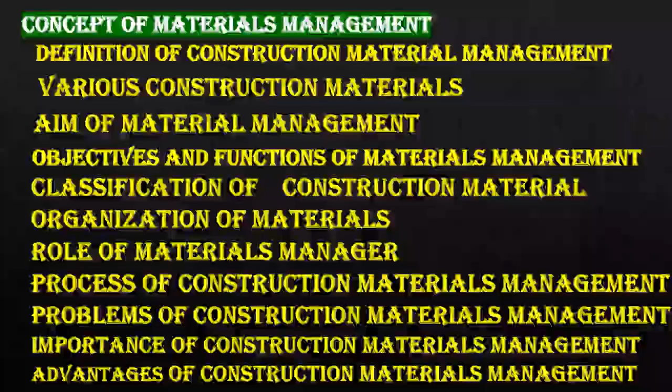So we will discuss one by one. First let us discuss the definition of construction material management.

Materials management is defined as planning, identification, procuring, storage, receiving, and distribution of materials. So this materials management means managing the materials. Since we study construction material management, it is managing the construction materials or managing the materials in a construction project. So how to manage the materials?

We know that all materials in this world deteriorate day by day. As time goes on, the materials deteriorate - their strength reduces, their size reduces. When we take steel bars, they corrode, so the area of steel bars gets reduced. If the area of the steel bars is reduced, naturally the strength also gets reduced. So it is important to manage the materials.

So how to manage the materials? Proper planning, identification - proper planning of materials, how much materials we require. Don't purchase whatever is unnecessary, don't purchase more materials - purchase what is needed for you. So plan to purchase how much materials is required for you.

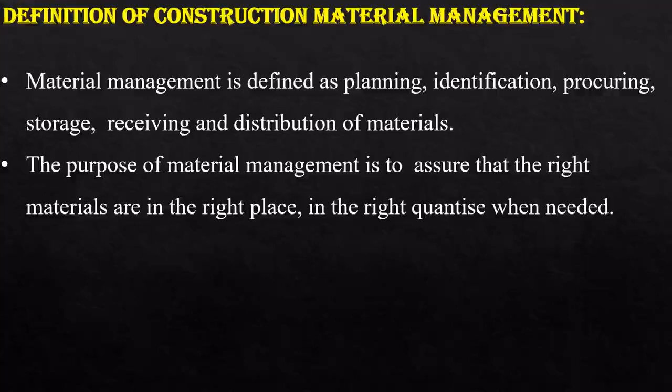Now, the purpose of material management is to assure that the right materials are in the right place, in the right quantities when needed. So that is the aim or purpose of construction material management. You need the right materials - standardized materials, ISO materials, whatever is accepted by the codes. So assure that the right materials are in the right place. When you start the construction project, as per your schedule, your materials should be available in right quantities. The responsibility of the material management department is for the flow of materials from the time they are ordered, received and stored until they are used - that is the basis of material management.

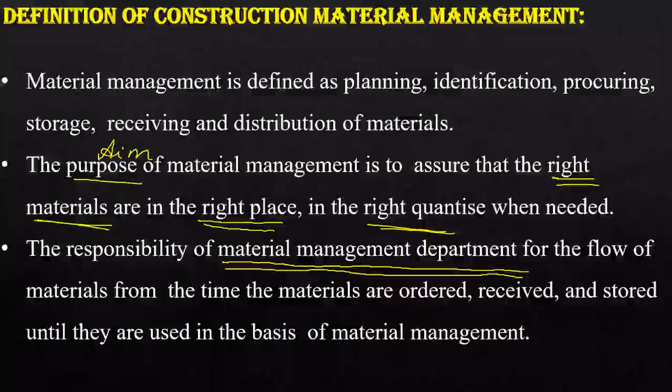In the large construction industry, there is a department called the material management department, because the main resource used for construction is the materials. The duty of this department is to check the flow of materials from the time they are ordered, how they are received and stored, and how they are utilized, so that you can avoid delay in the construction project and proceed your work as per the scheduled time.

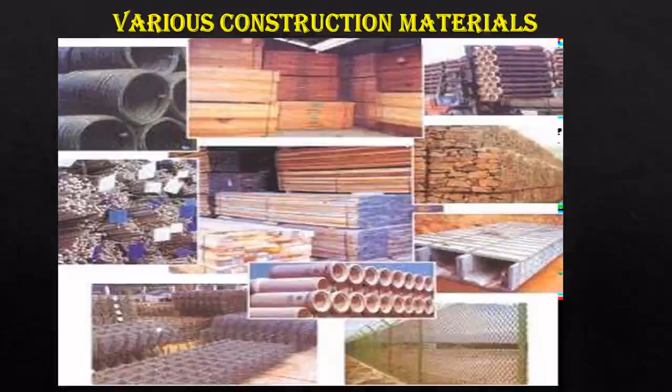Now let us see about various construction materials. Just a photograph showing construction materials - you are all well aware about them. We have various materials like cement, aggregates, fine aggregate, coarse aggregate, water, reinforcement bars, and some specialized materials like super plasticizers, etc. Then, in order to proceed with construction, we need some formworks, etc. Let us see a photograph - wooden materials, the stones, the bars, pipes, etc.

Now let us see the aim of material management. We have already discussed getting the right materials at the right time - that is the purpose or aim of material management. So the aim of material management is to get the right quality, the right quantity of supplies at the right time, at the right place, for the right cost. So, 5 important rights: the right quality, right quantity of supplies, at the right time, at the right place, for the right cost.

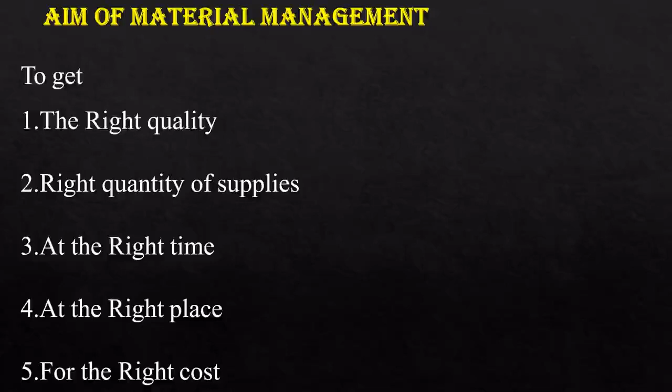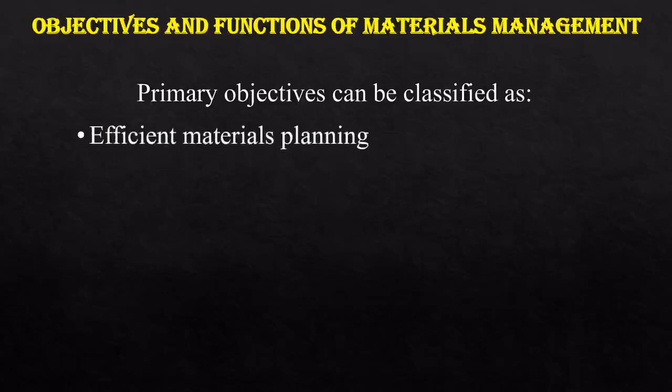Now, the objectives and functions of materials management. In the construction projects, we will classify our objectives into primary objectives and secondary objectives. The primary objectives are again classified as efficient materials planning, buying or purchasing, procuring and receiving, storing and inventory control, supply and distribution of materials, and quality assurance. We will see these one by one.

So, efficient materials planning - as we have discussed earlier, the materials should be planned efficiently so that you can proceed your work as per the schedule. Then while buying and purchasing, you have to select the right vendor for your material. Then when you procure and receive, you should be very careful to procure and receive the material in the right quantity, that is, there should not be any damage.

Now, storing and inventory control - inventory control means controlling the stored materials. You should be very careful so that you can avoid damage of stored materials. Then, supply and distribution of materials - the right materials at the right time, at the right place.

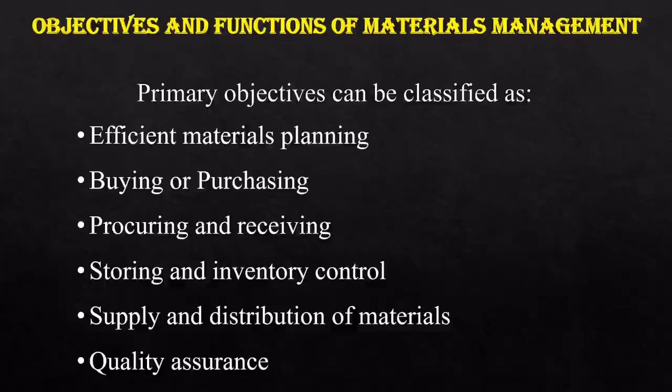Now let us move on to secondary objectives of material management. This includes efficient production scheduling and make-or-buy decisions. So, efficient production scheduling - this is a part of material scheduling.

Then make or buy decisions. So when you have more than one vendor, when you have more competitors, you have to take a decision from where you have to buy and purchase your materials.

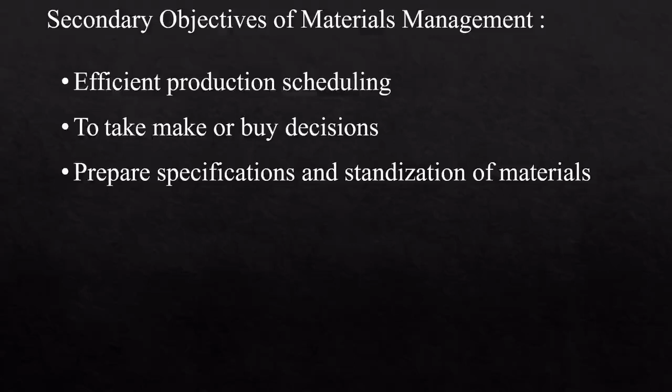Then prepare specifications and standardization of materials. For example, if you take cement, we have different grades and types of cement. So you have to prepare the specifications: what grade of cement we require, which standard material we require, what is the purpose of our cement, what type is required, etc. So for each and every material, you have to prepare the specifications and standardization.

To assist in product design and development. So according to the availability of the materials, you can design and schedule your construction work.

Then forecasting demand and quantity of materials requirement. Before the start of the project itself, you have to forecast how much material is in demand and what is your requirement, whether you are able to procure these materials at the right time. So you have to forecast and move as per the forecast.

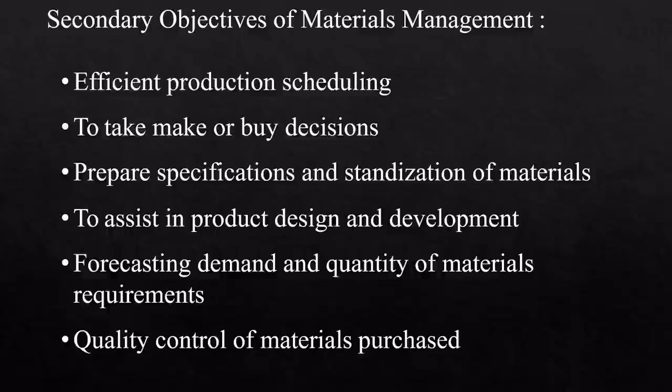Then quality control of materials purchased. You should have control on your material so that you can assure the quality. Only if you have control in the quality, you will be able to assure the quality. Assurance means giving assurance to the next person. When we hand over the project to the owner, we have to assure the quality of the product. So you will be able to assure the quality only if you have proper control on your materials.

Next is material handling. We have to handle the materials in a proper way.

Use of value analysis and value engineering: value for money, value for men, value for materials, etc. In the previous classes, while studying ethics, we studied about value engineering. Value everybody, respect everybody.

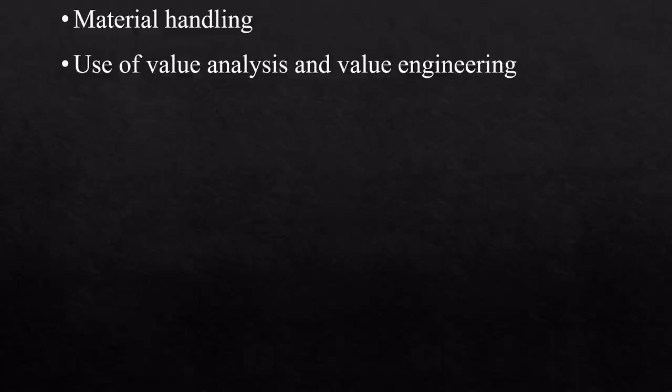Then developing skills of workers in material management. Normally we try to develop the skills and give training for the masons or the men working in the field of construction industry. But on the material management side, the men may lack the training or skills. So the skills of the workers in the materials management department have to be developed.

Smooth flow of materials in and out of the organization. This is also the duty of the material management department. There should be smooth flow of materials. No work should be stopped because of lack of materials.

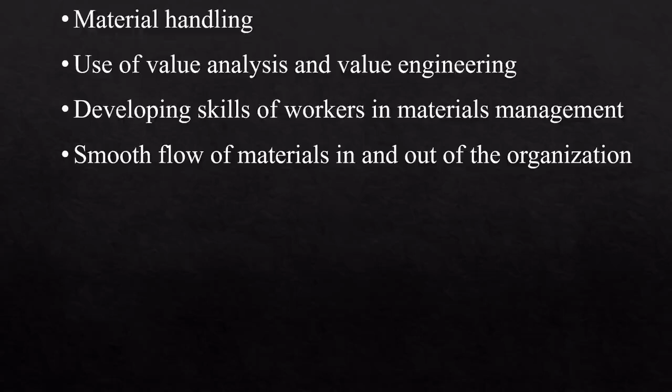Now we will move on. We will just see in a nutshell about the objectives of material management.

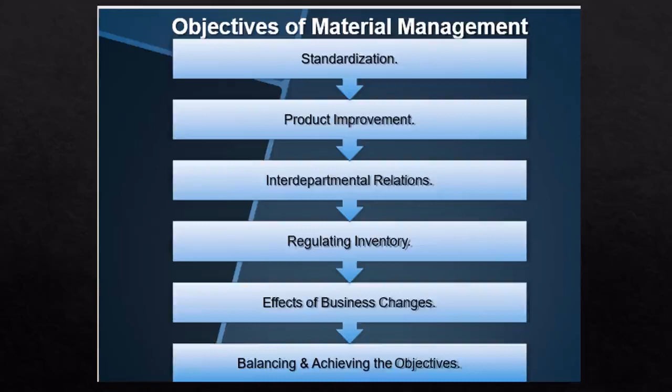Purchasing the materials at low rates, keep the department expenses low, development of good suppliers and maintaining good relations, development of good records, participating in development of new materials and products, economic make or buy, standardization, product improvement, interdepartmental relations, regulating the inventory, effects of business changes, balancing and achieving the objectives. All these points we have discussed in the previous slides.

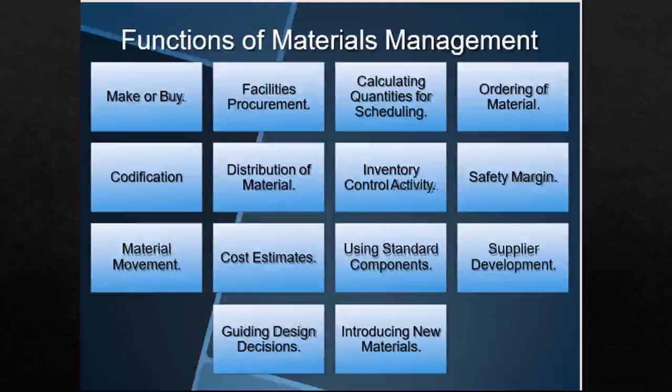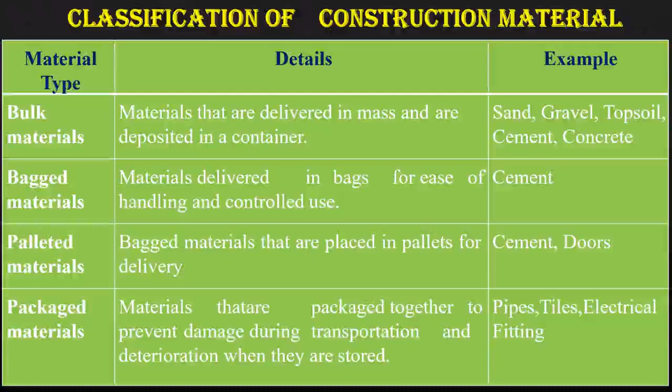The fourth type of materials is packaged materials. So what is the difference between bagged materials and packaged materials? Materials that are packaged together to prevent damage during transportation and deterioration when stored. Examples are pipes, tiles, electrical fittings, etc. They don't come in bags, but they will be packed together. These materials will be stored and distributed in a packed manner, so we call it packaged material.

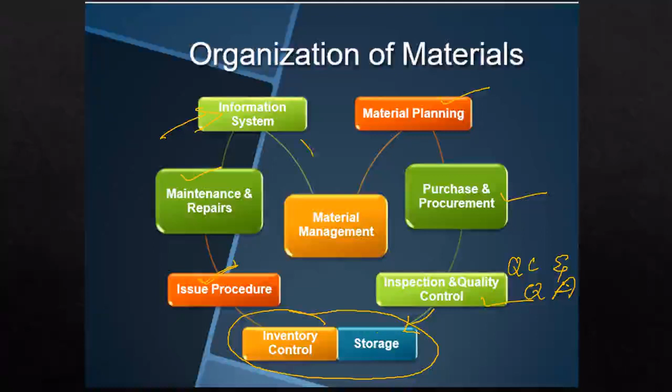Up to storage, the planning of materials, purchase, procurement, inspection and quality control, and then storage - this is one process. The next process goes from inventory control to issue procedures. So if there is any damage of the stored materials or they need maintenance - for example, we need to protect cement from dampness - that is an example. Then a proper information system is needed in order to deliver the materials in a proper manner. So all these come under materials management, organization of materials.

What is the role of materials management? When there is a materials management department, there will be a manager for this construction materials management department. So what is the role of this materials manager?

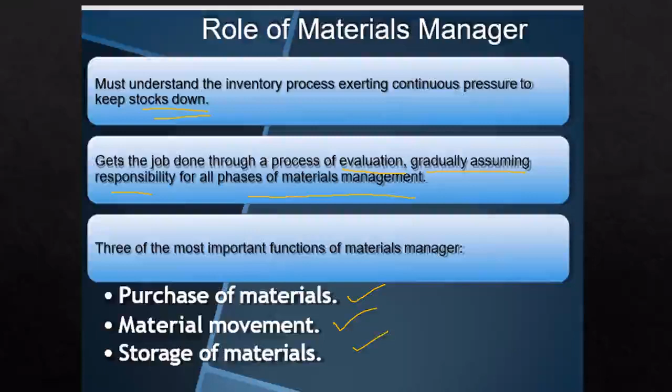The materials manager must understand the inventory process, exerting continuous pressure to keep stocks down, to get the job done through a process of evaluation, gradually assuming the responsibility for all phases of materials management. The three most important functions of the material management manager are purchase of materials, material movement, and storage of materials, and having control on all these three.

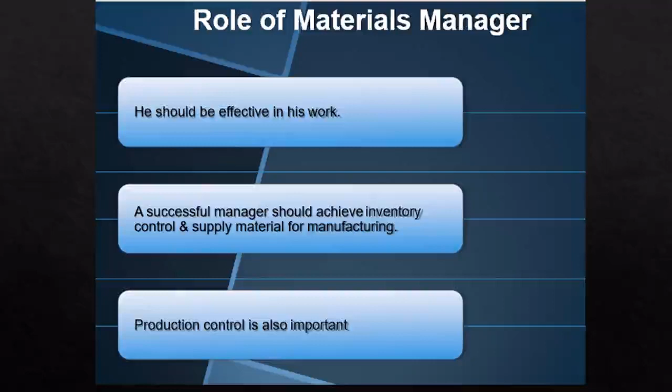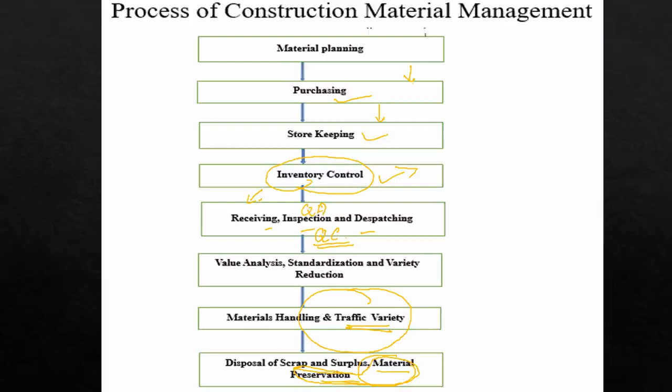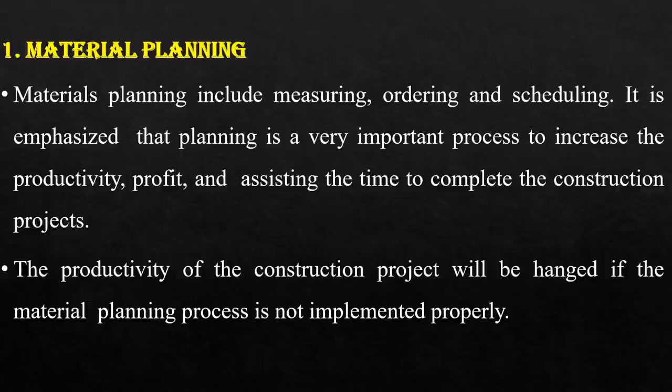So we will see one by one. The first step is material planning. Material planning includes measuring, ordering and scheduling. It is emphasized that planning is a very important process to increase the productivity, profit and assist the time to complete the construction projects.

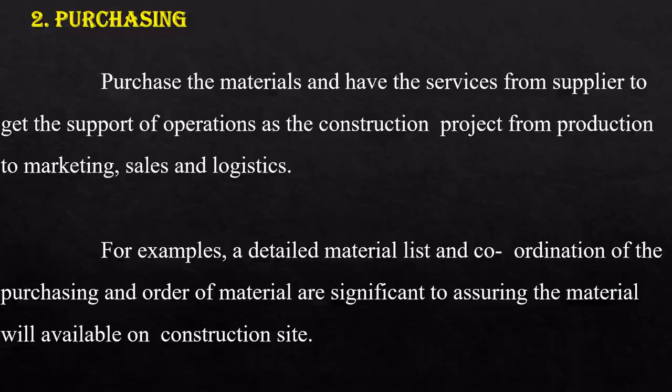The productivity of the construction project will be hampered if the material planning process is not implemented properly. Second step was purchasing. Purchase the materials and have the services from supplier to get the support of operations for the construction project, from production to marketing, sales and logistics. For example, a detailed material list and coordination of the purchasing and order of materials are significant to assuring the material will be available on construction site.

Then purchasing procedure can be described as step 1, the material indent. Indent means to start the purchase of materials. After planning how to start, that is the starting phase, that is material indent.

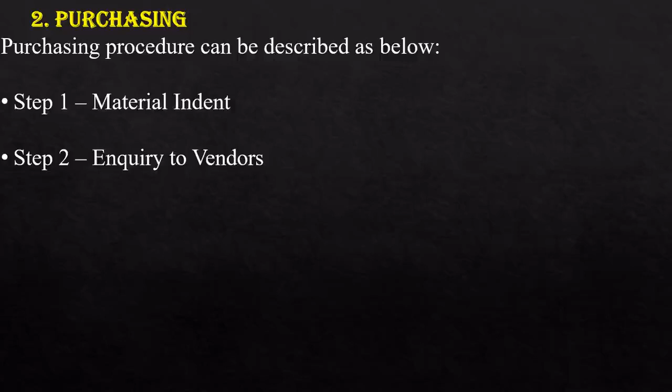Step 2 is the inquiry to vendors. You will have more than one vendor to supply the materials. So inquiry to vendors, then compare the vendors, select the vendors and do proper negotiations, purchase the order, and after purchasing you evaluate that particular vendor from where you purchased the materials so that you can purchase materials for future use from the same vendor, or you can change the vendors after evaluation.

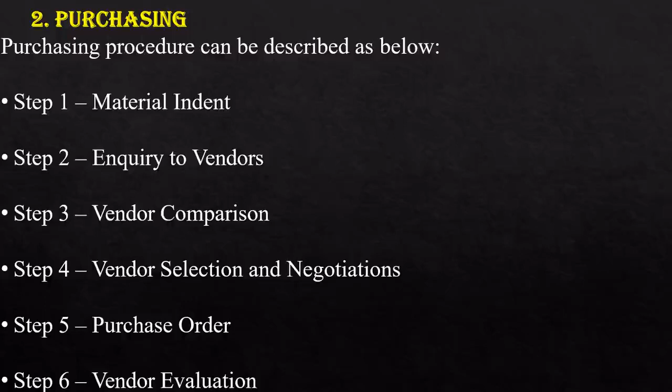Now, third step in the process of construction materials management is inventory control department. The duties of the inventory control department are to decide about the types of ordering system, fixing the safety stock limits, fixing up the reorder level and maximum or minimum stock level.

Only when you take a construction project, a percentage of the land of the construction project should be dedicated or separated for the storage of materials. So you will have only limited space for storing the materials. It is the duty of the inventory control department to decide when to order the materials, to look after the safety measures, when to reorder the materials, how much maximum or minimum stock is available, and whether the available materials are enough for the free flow of materials for the project.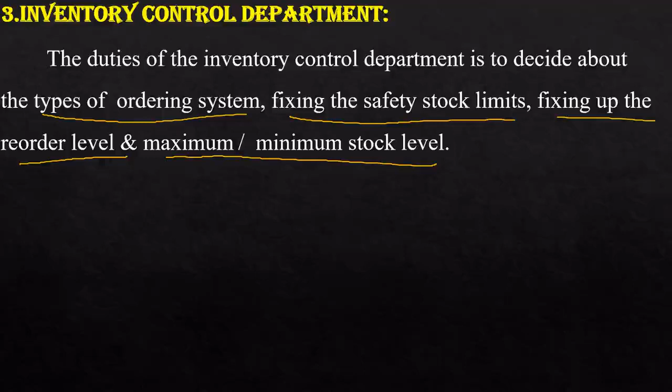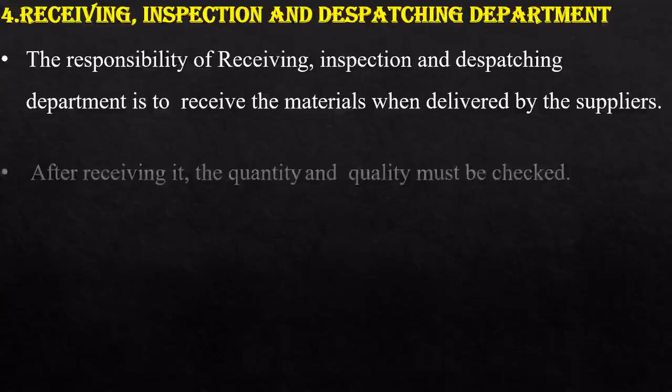Then fourth step is receiving, inspection and dispatching department. The responsibility of this department is to receive the materials when delivered by the suppliers. After receiving the materials, the quantity and quality must be checked. The production parts and materials are checked against blueprints and specifications. Non-production items are also reviewed. Once it is as per the specifications given, the goods will be accepted.

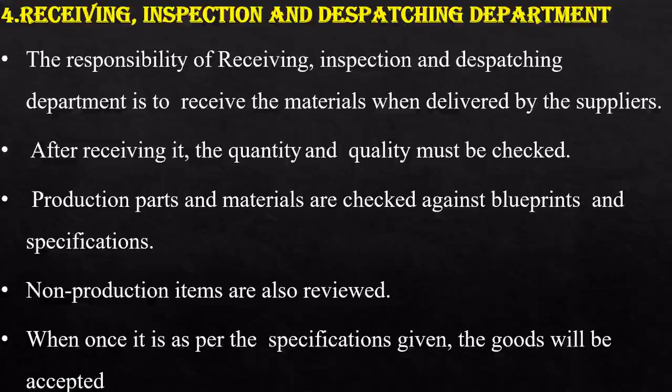Fifth step is the value analysis and standardization. Value analysis and standardization offer the greatest scope in reducing materials cost. It also reduces the number of varieties and helps in finding substitutes for materials at lesser cost.

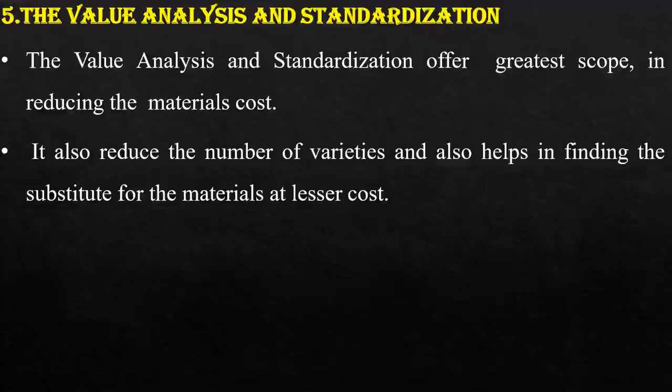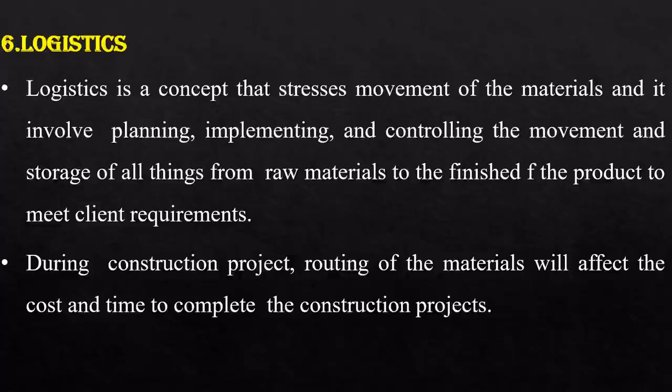The sixth step is logistics. Logistics is a concept that stresses movement of the materials, and it involves planning, implementing and controlling the movement and storage of all things from raw materials to the finished product, to meet client requirements. During construction projects, routing of the materials will affect the cost and time to complete the construction projects.

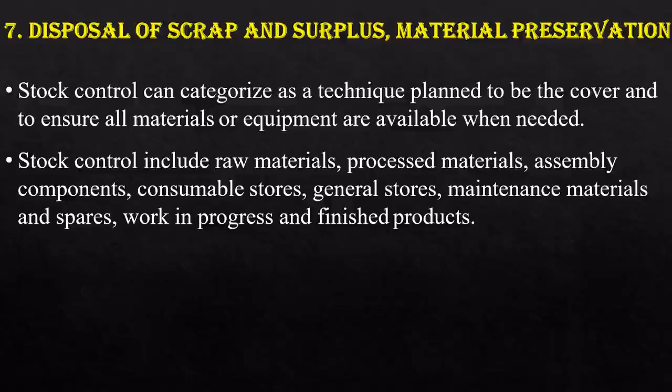Seventh is disposal of scrap and surplus, and material preservation. Stock control can be categorized as a technique planned to ensure all materials or equipment are available when needed. Stock control includes raw materials, processed materials, assembly components, consumable stores, general stores, maintenance materials and spares, work in progress, and finished products.

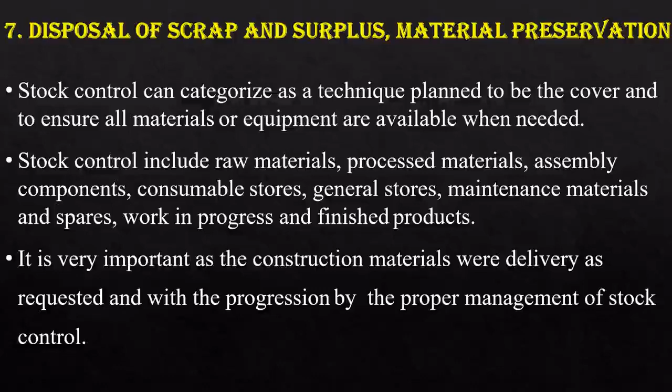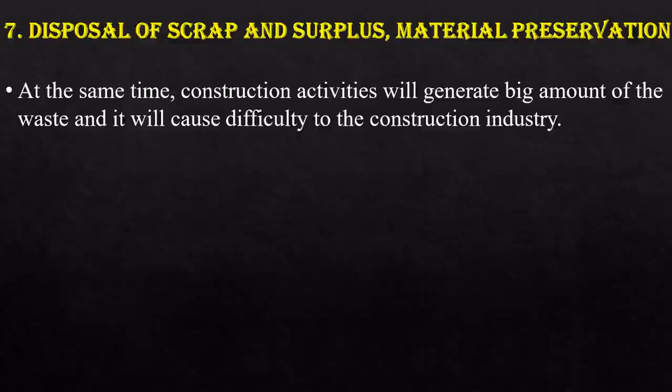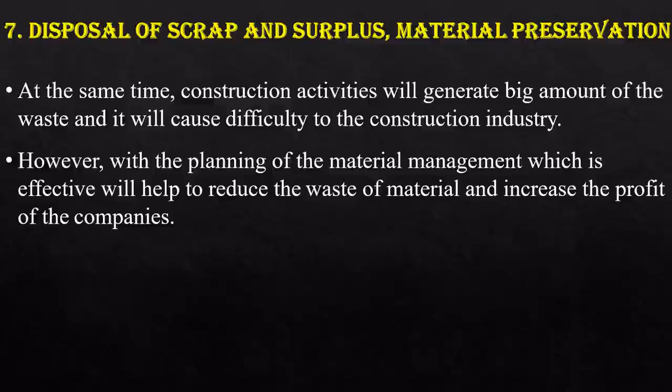It is very important that construction materials are delivered as requested and with progression, through proper management of stock control. At the same time, construction activities will generate a big amount of waste and it will cause difficulty to the construction industry. However, effective planning of materials management will help to reduce the waste of material and increase the profit.